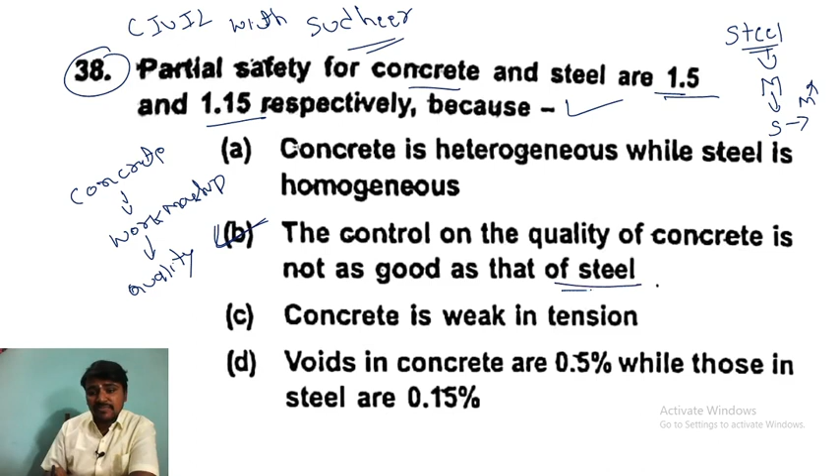Partial safety factor for concrete and steel is 1.5 and 1.15 respectively, because yesterday I explained that concrete is always manufactured by workmanship, so the quality will be compromised and the strength may vary. But coming to steel, it will be manufactured with proper methods, proper specifications, and in good condition, so the strength can be assumed very easily. That's why the partial safety factor for concrete and steel is 1.5 and 1.15, because concrete is heterogeneous while steel is homogeneous. Control on the quality of concrete is not as good as that of steel, so this is the correct answer for this question.

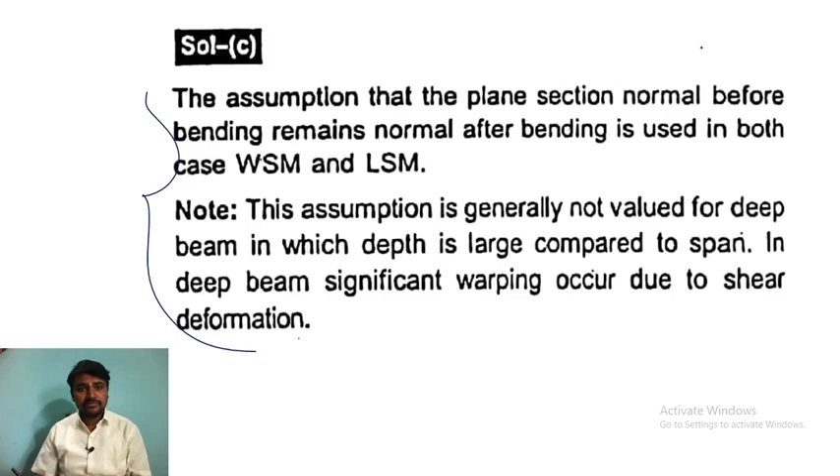Next, question number 39. The assumption that plane sections normal to the axis before bending remain normal after bending is used in which method. Always remember there are design methods - normally we use the limit state method for design of members, and one of the old methods is the working stress method. There are some assumptions we use while designing structural members. Is this assumption used only in limit state method, or only in working stress method, or in both? In both working stress and limit state method we use the plane section assumption. For example, if this is a plane and you bend it, the cross sectional front area will not change, but the total area will change - the plane section itself will not change. That is the important point to remember. So the answer for this question is C.

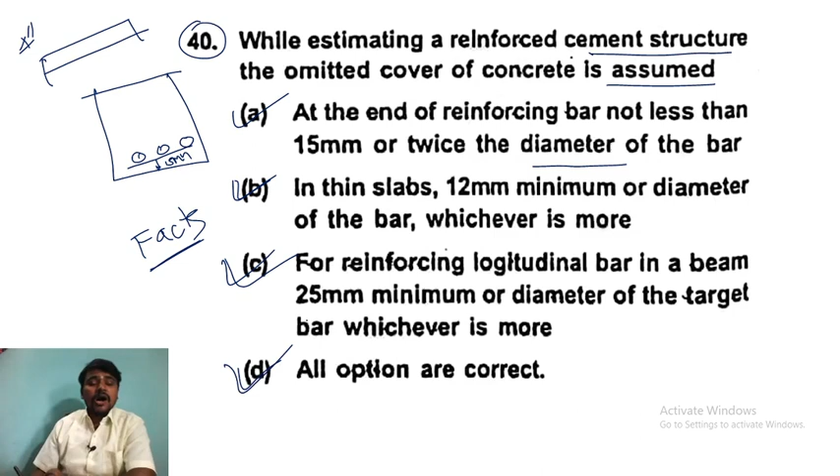Next question: according to Whitney's theory, the maximum depth of concrete stress block in a balanced RCC beam section of depth D is taken as...

They have asked about balance as well as Whitney theory. Whitney theory is different. Let me explain what Whitney theory is. It is for ultimate load theory. It is an ultimate load theory.

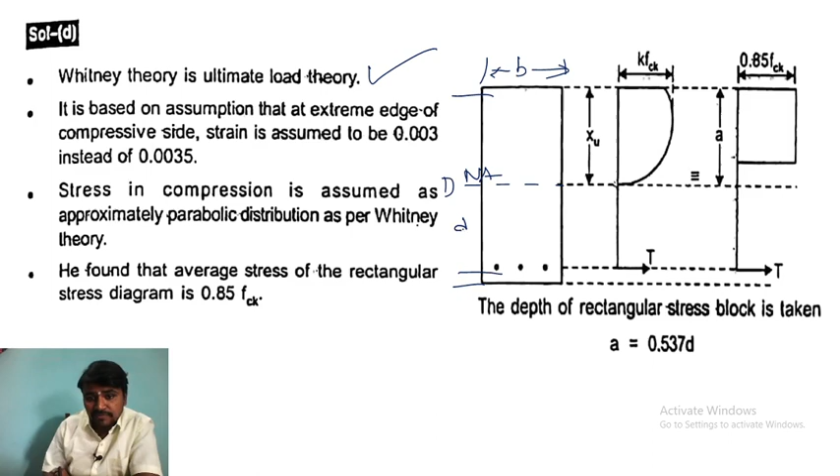You can see this is a sketch and this is the neutral axis. This is a cross section of the beam. This is B and this is the overall depth, and this is the effective depth. So this is a stress diagram and this is a strain diagram. You can see there is always a parabolic portion, and there is a rectangle portion as well.

It is based on the assumption that the extreme edge of compression side strain is assumed to be 0.003 instead of 0.0035. So they are taking 0.003 by using this Whitney theory, ultimate load theory. Stress in compression is assumed as approximately parabola. So this is the stress diagram, and this is the strain diagram.

The strain and T is compression. This is compression, sorry, this is tension here, and this one also tension here. So the depth of rectangular stress block is taken as 0.537 D.

D is the effective depth. He found that the average stress of the rectangular stress diagram is 0.85 FCK. You have already written 0.87 Fy, right? So you have to remember it like this. This is about Whitney theory.

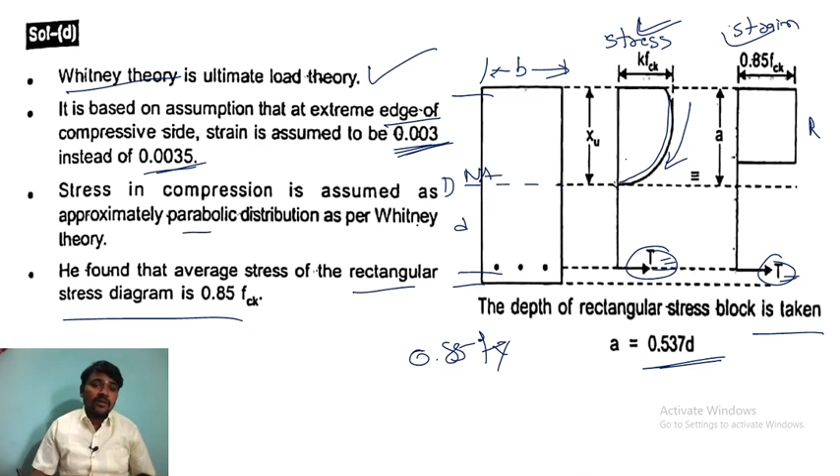Next question, question number 42. Previous question's answer is which one? This question's answer is 0.53 D. Remember, they asked about Whitney theory. If they only ask about the balance section, the answer will be different.

Next question: the limit state of serviceability of pre-stressed concrete sections should satisfy. What should it satisfy? Limit state of serviceability. Another one is which one? There are two limit states: one is limit state of collapse and one is limit state of serviceability. So coming to this one.

The deflection and the cracking section should satisfy to overcome the state of serviceability of any structure. So the acceptable limit for the safety and serviceability requirement before failure occurs is called limit state. Limit state is nothing but safety and serviceability before failure, that we call limit state.

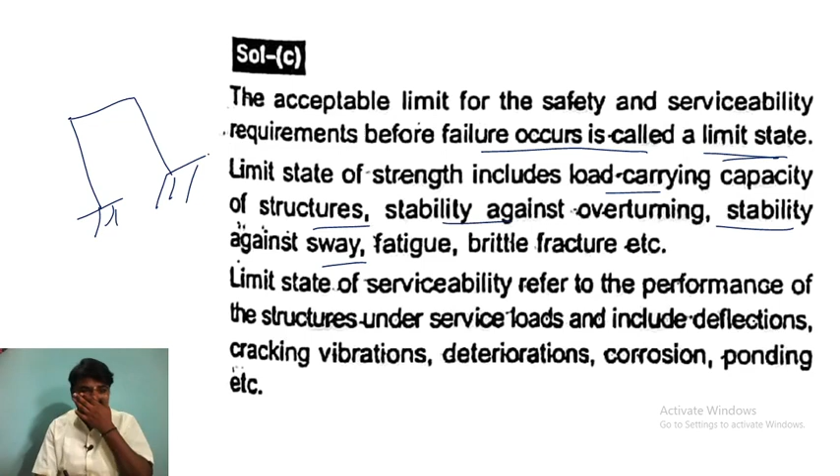So limit state of strength includes what? Load carrying capacity, structure stability against overturning, stability against sway. This is a plain frame. So when you apply the load from this, it will appear like this, that is against sway.

Fatigue, brittle fracture. So limit state of serviceability refers to service loads that include deflection, cracking, vibration, deterioration, corrosion, and ponding. So all these factors you have to remember.

The unit weight of RCC in kg per meter cube: remember, for plain concrete it is 2400 kg per meter cube, and for RCC it is 2500 kg per meter cube. If converted to kilonewton, it is 24 kilonewton per meter cube.

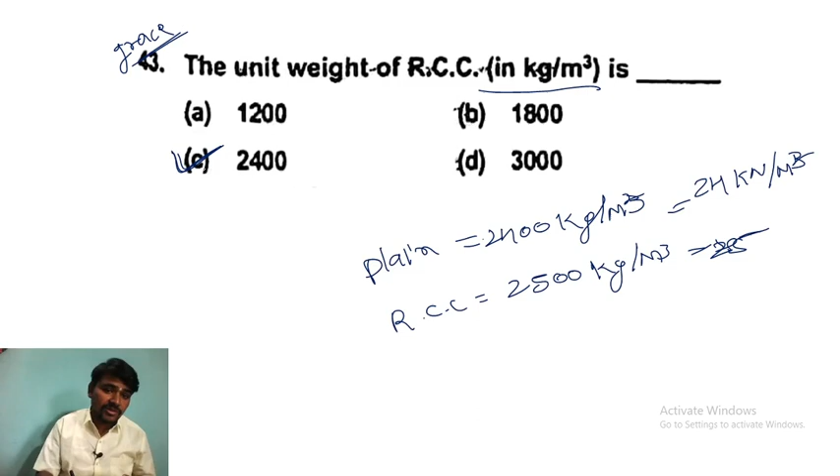Here they asked about the unit weight of RCC, but you can see this is 2400 kg per meter cube for plain concrete, and for RCC it is 2500. Most appropriate option, because they have not given the option nearby. Either you have to tick this one or they will give grace marks, because the options are not given correctly. This is the appropriate answer.

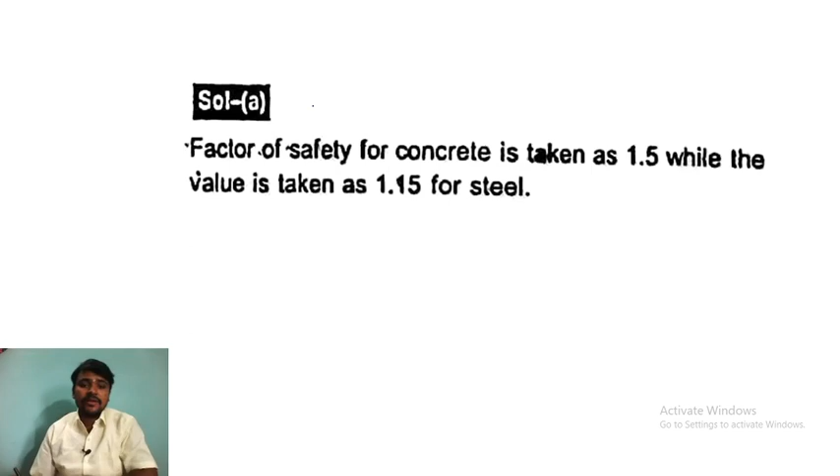The partial factor of safety for concrete as per IS 456: partial safety factor for concrete is 1.5. Factor of safety for concrete is 1.5, and 1.15 for steel.

Next question, question number 45: the approximate allowable stress in axial compression in reinforced concrete. Always remember, for design purpose, yesterday only I have drawn the diagram. This is a stress diagram, and this is strain.

So we have three different lines, we can say. This is 0.002, and this is extreme fiber 0.0035. This one is FCK and this is 0.67 FCK. Why do they take the size effect here? Because what we tested is the cube size, that is 150 mm, but the actual size of the structure is very different. So that's why we have to take the size effect. For the design purpose, for actual purpose, again you have to use 0.67.

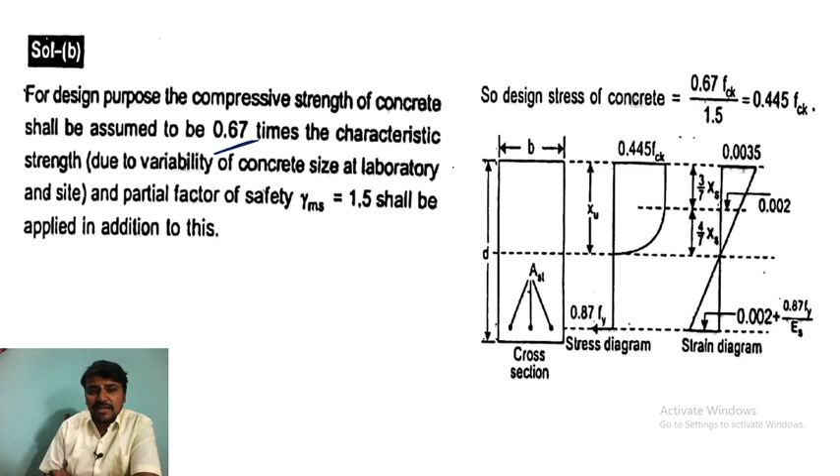0.67 divided by 1.5 gives you 0.44 FCK, so you have to use this 0.44 FCK for design purpose. Design compressive strength of concrete shall be assumed as 0.67 times the characteristic strength. Due to variability of concrete at laboratory and site, a partial safety factor of 1.5 shall be applied in addition to this, giving 0.445.

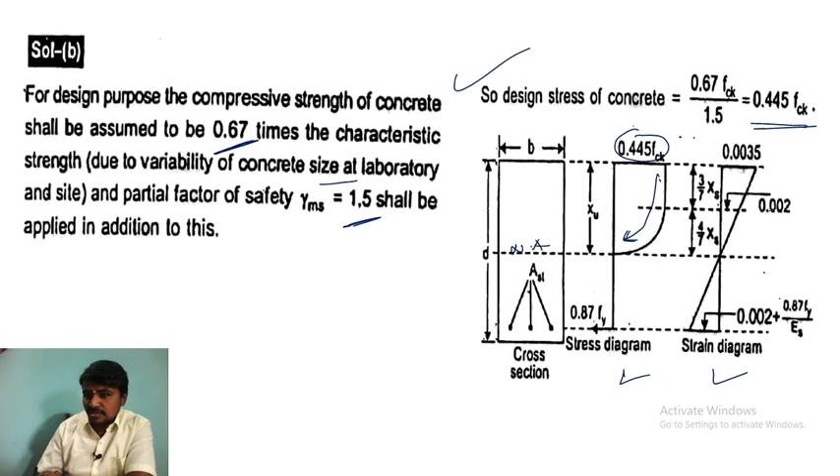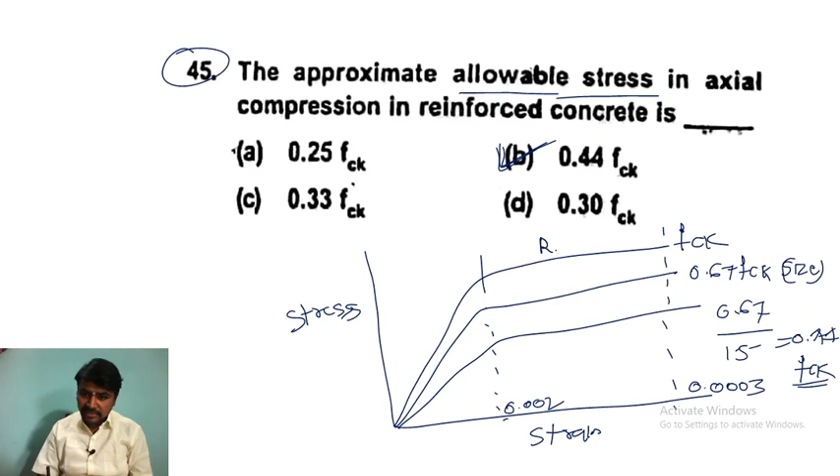This is a stress diagram and this is a strain diagram. You can see 0.445 FCK here, and this is a parabolic portion. XU is the limit depth, or we can say the actual neutral axis. Here is the actual neutral axis. This is 0.002, as shown in the diagram. This is the rectangular portion and this is the parabolic portion.

Next question, question number 46. Tensile strength of concrete to be used in the design of reinforced concrete members is always 0.7 root FCK.

Don't think that all questions are easy, because first I will cover all the easy questions, so that you may have some confidence while studying. Then I will take some difficult questions.

Don't worry. Tensile strength of concrete is 0.7 root FCK and it is tested for 28 days, and the cube size is 150 into 150 into 150 mm.

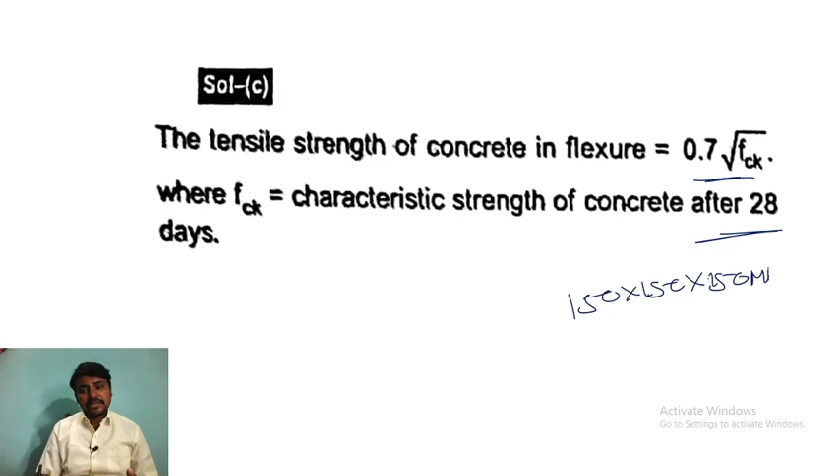Next question: the minimum quantity of cement content that is needed in 1 meter cube of reinforced concrete which is directly exposed to weather.

Minimum quantity of cement content exposed to weather is about...

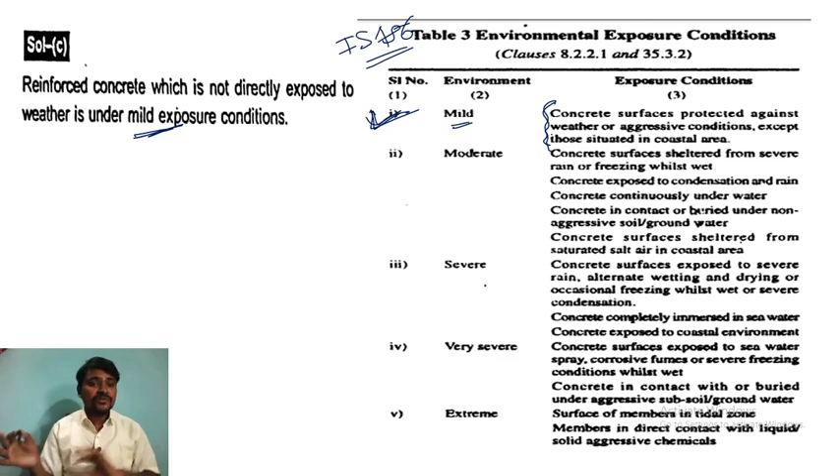And this is table number 5: minimum cement content, maximum water cement ratio, minimum grade of concrete. We will discuss all this, which they have given in clause 6.1.2, 8.2.4.1, 9.1.2.

So how do you remember how to read this table? Very easy. First of all, draw one line here because it is plain concrete and reinforced concrete. You have to remember three different parameters here: minimum cement content, maximum free water cement ratio, minimum grade of concrete.

And 5 conditions: mild, moderate, severe, very severe, extreme. You have 5 exposure conditions. For mild condition in RCC, they have given 300. If they ask moderate, it is 300, for severe 320, very severe 340, and extreme is 360.

So you have to remember the different grades also, they may ask the grades. Easily remember, this is increasing order: 20, 25, 30, 35, 40. You can easily remember 0.55, 0.5, 0.45, 0.45, 0.4. They may ask in plain concrete also, but if possible you have to remember this minimum one for RCC.

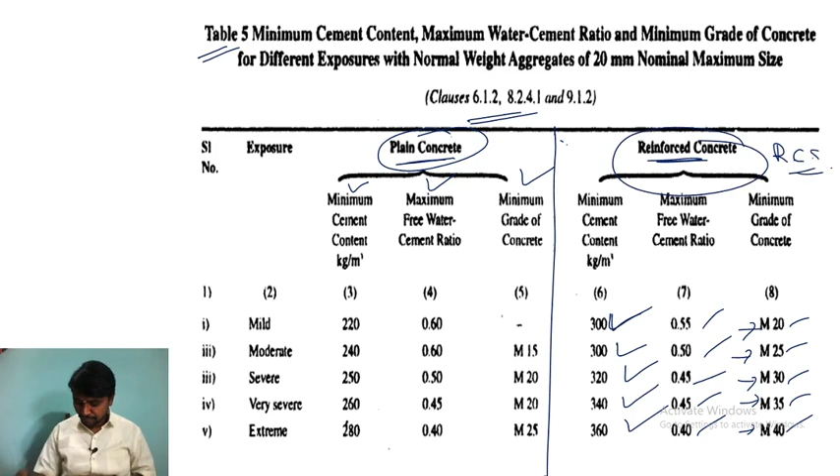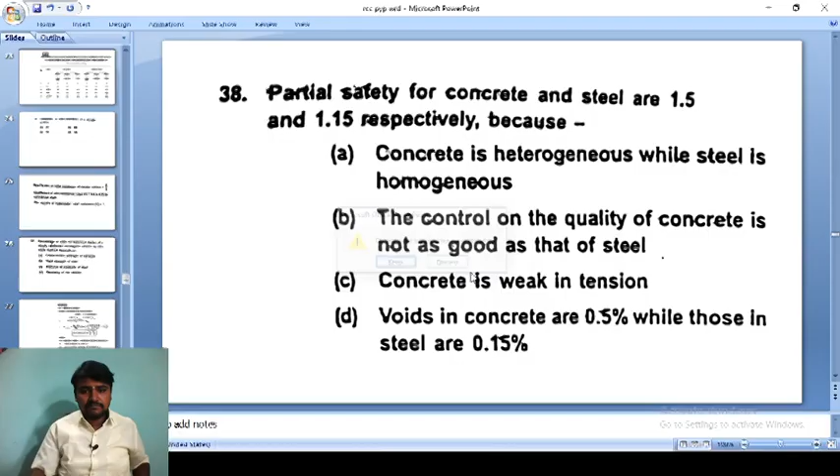Next question, question number 48. Okay, wait a second. One minute.

I will change the color of the pen because it is not visible to you.

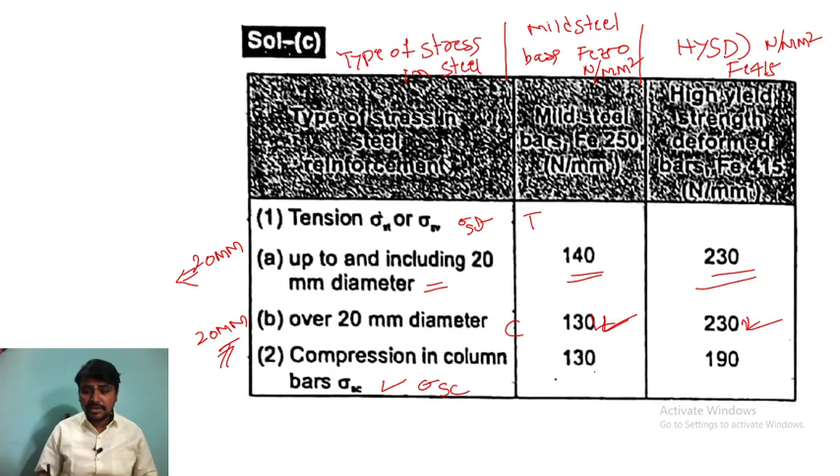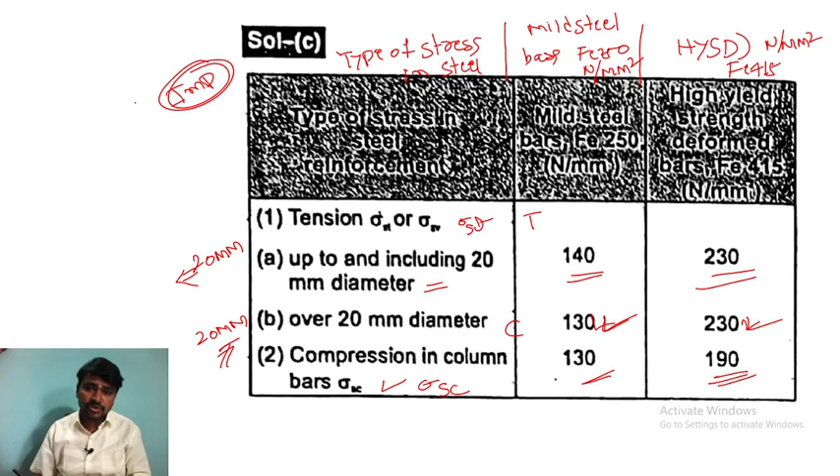If it is in compression, column bars, sigma SC, permissible stress in compression is 130 for mild steel and 190 for the HYSD bar. This tabular column is important, remember this one. You can take a screenshot if you want.

Okay, done. Next question, question number 49.

M10 grade of concrete, approximate dash mix. So M10, how many of you can answer this easily? M10, they are asking.

M10 means, as per IS 10262:2009 - this is a concrete mix design code, you have to remember. Important point: for different grades of concrete, M10 is 1:3:6, M15 is 1:2:4, M20 is 1:1.5:3, and M25 is 1:1:2.

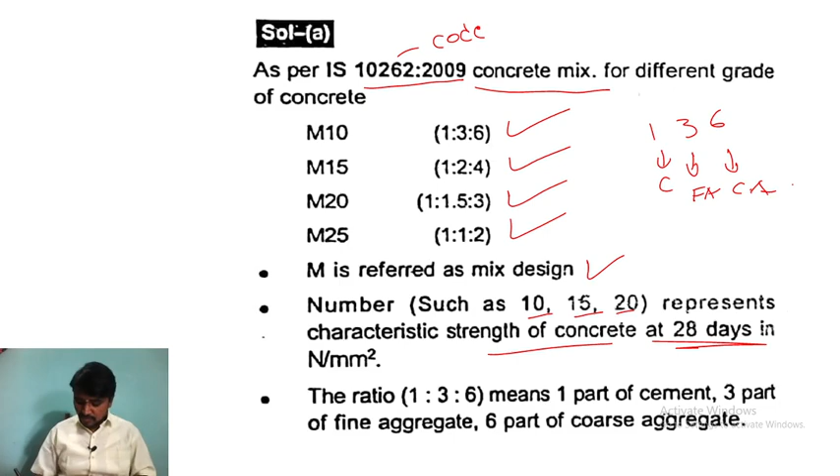Question number 50: the maximum allowable percentage of tension reinforcement in RCC beam. They are asking tension reinforcement, and how much maximum - always remember it is 4%.

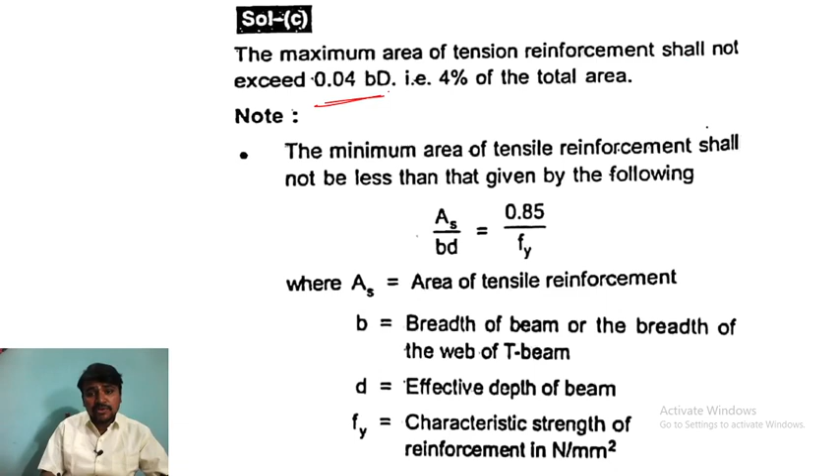Let me explain: the maximum area of tension reinforcement shall not exceed 0.04 B into D. This is the cross sectional area, we can say. When we draw, the beam will come in cross section.

Cross section of the beam, this is the neutral axis. This is B and this is D, overall depth. So when you multiply these, you get the cross sectional area. That is the 4% of the total area they will take.

So the minimum area of tensile reinforcement shall not be less than AS divided by B into D equal to 0.85 divided by Fy. AS is the area of tension reinforcement, and B is the breadth of the beam or the breadth of the web, as in a T beam.

This is the T beam - this is the flange and this is the web. So breadth of the beam or breadth of the web of a T beam. D, small d, is the effective depth of the beam. Fy is the characteristic strength of the reinforcement in Newton per millimeter square. This formula is very, very important.

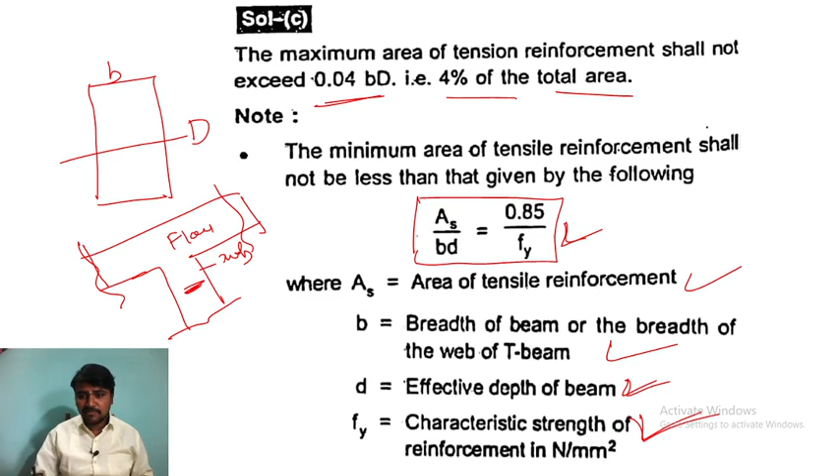Please remember this formula to calculate minimum tension reinforcement in the beam.

Question number 51: if the thickness of a structural member is small as compared to its length and width, it is classified as - before solving this, just remember, for example, this is a slab. The thickness is very less compared to its length.

This is length and this is width. So what will we do? We will ignore the thickness in this type of condition, because the length and width are much higher compared to the thickness. That type we call two-dimensional. Simple question: if they ask what is a two-dimensional structure in a building, remember the slab - thickness of structural member small compared to length and width is called two-dimensional.

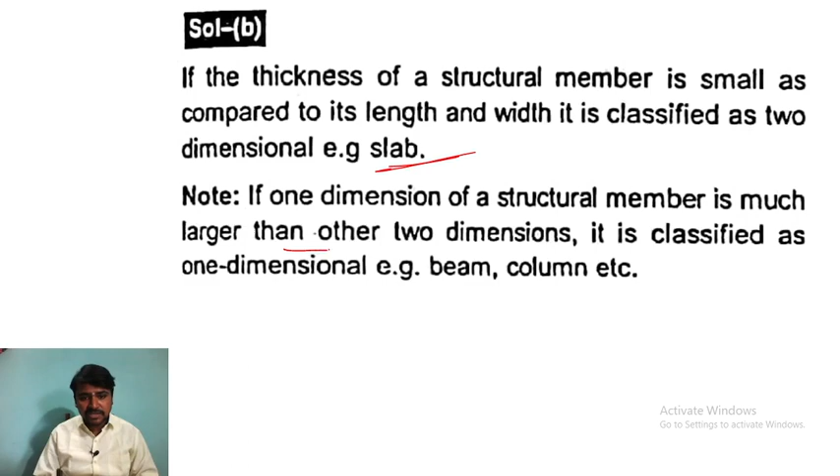Example is slab. If one dimension of a structural member is much larger than the other two dimensions, it is classified as one-dimensional. Example: beam and column. One dimensional is beam and column, two-dimensional is slab. Always remember.

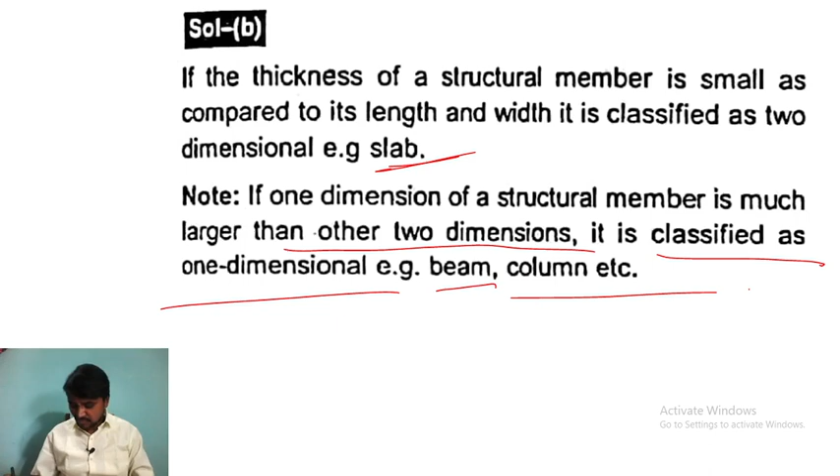Important question: factor of safety is the ratio of what? Yield stress to working stress. Factor of safety is the ratio of yield stress to working stress, or the ratio of ultimate strength of the material to working strength, that is the permissible stress. So yield stress by working stress, and factor of safety relates to the strength of the material.

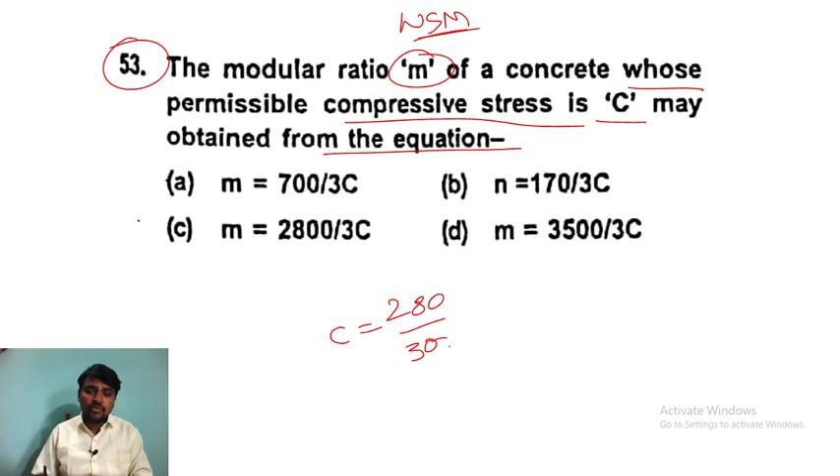Next, question number 53: the modular ratio M in working stress method. When M will come, this is in the working stress method, of concrete whose permissible compressive stress is C, may be obtained from the equation. Always remember M equals 280 by 3 tau CBC. This is the formula, but they have given it differently here. Let me see the difference.

Modular ratio of concrete in working stress method is M equals 280 by 3C, where C is the permissible compressive stress in Newton per millimeter square. It always depends on the grade of the concrete. This permissible strength depends on the grade of concrete. We have a tabular column in IS 456 you can refer to.

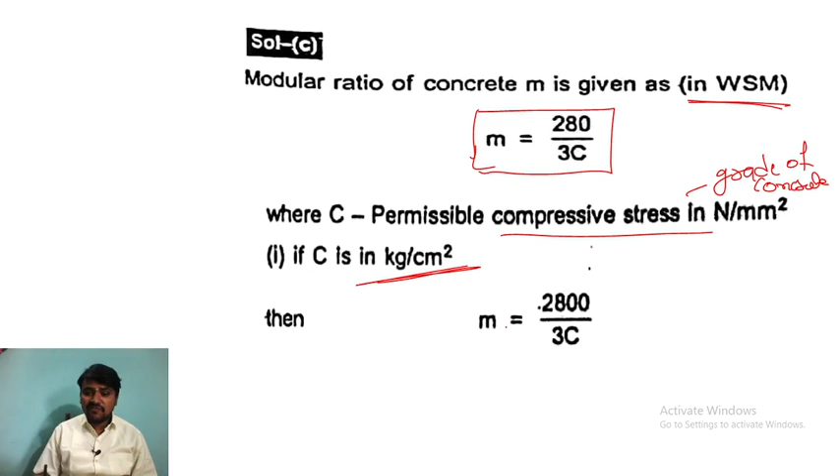If C is given in kg per centimeter square, then the formula changes to 2800 divided by 3C, or instead of writing C, we can write tau CBC also. So the answer for this question is C.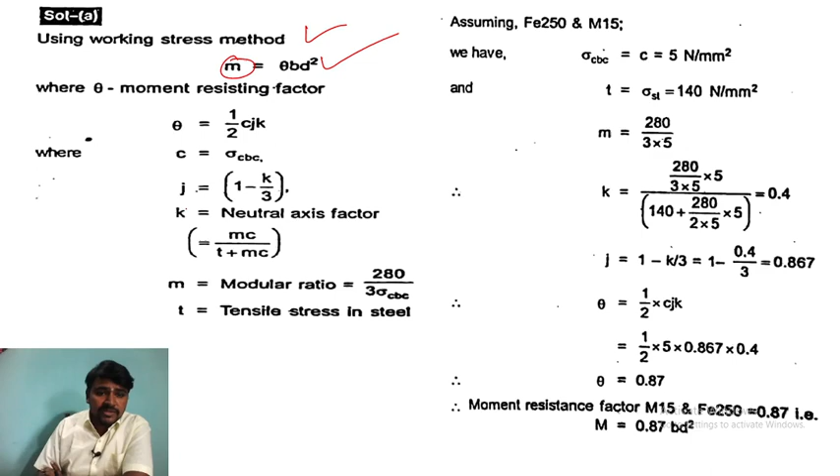K is the neutral axis factor. When you apply this formula using the sigma CBC and modular ratio, you will get 0.87. 0.87 BD square for M15 and Fe 250. For the assumption purpose, they have given M15, but 250 they have taken as mild steel for assuming.

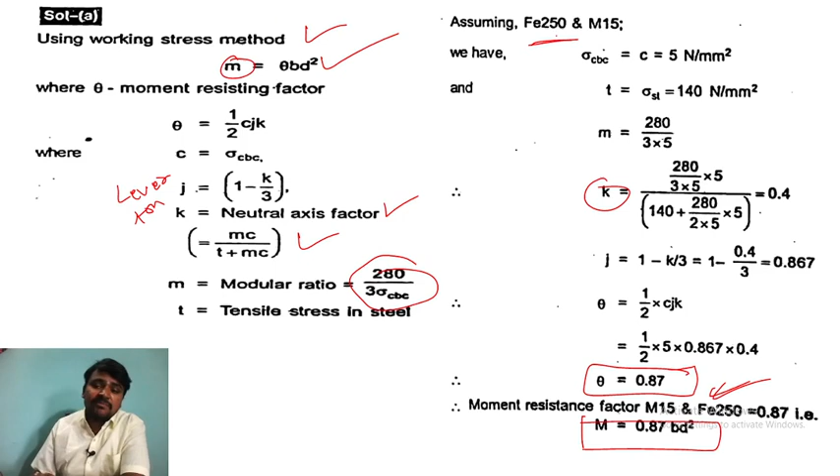Next question: if the stress in each cross section of a pillar is just equal to its working stress, this form is called... When each cross section of a pillar is just equal to its working stress, we can say all the sections are a form of equal strength. For example, they are saying this is the pillar - each cross section means breadth, this is depth, and this is B. Cross section of the pillar just equals its working stress means however much load you apply, it will take that only. So that is a form of equal strength for all the pillars.

According to IS 456, the number of grades of concrete mixes - remember this, it is very very important. They are asking the number of grades of concrete mixes. So according to IS 456:2000, first one is ordinary concrete, that is from M10 to M20 - 10, 15, 20, so 3 numbers.

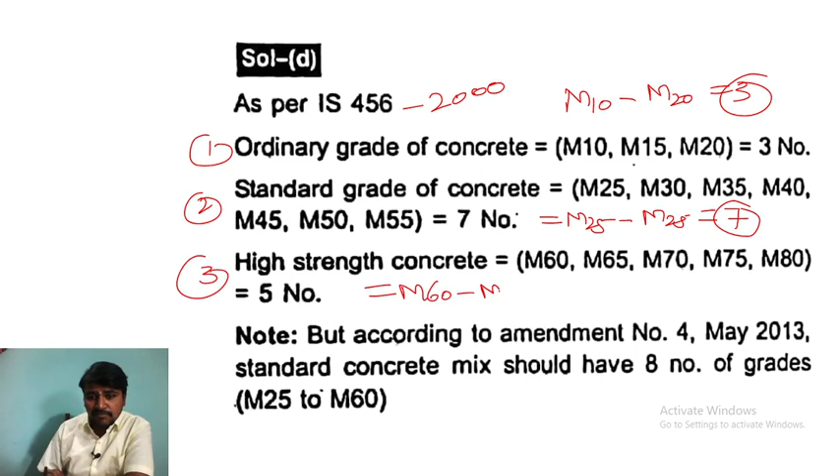Second one, standard concrete. In standard grade of concrete from M25 to M55. How many numbers? 7 numbers. Third one, high strength concrete, from M60 to M80. How many numbers? 5 numbers.

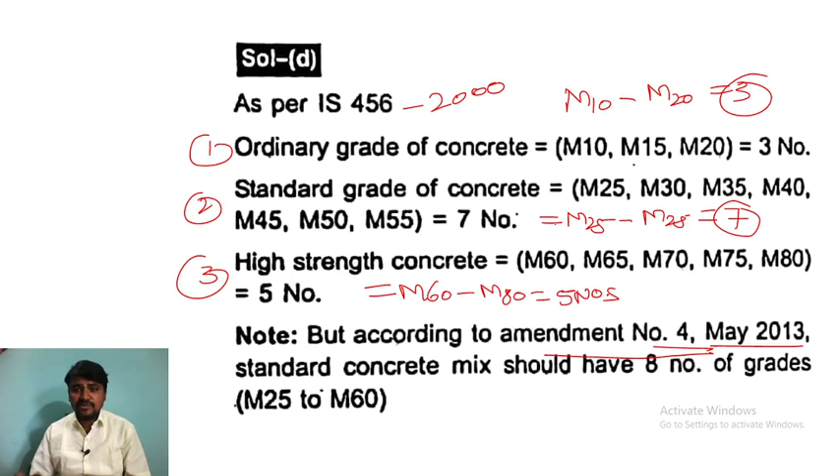But according to amendment number 4, May 2013, they changed standard concrete from M25 to M60. So the number of grades will now be 8, because they have taken M60 into standard concrete, and in high strength concrete it is from M60 to M100 as already mentioned. So you have to remember how many grades to count. The answer for this question is 7, because they have given appropriately only 7; if they give 8, you have to select 8.

Right, done. Question number 57.

As per IS specification, the nominal concrete cover for moderate exposure should not be less than what? See, this is exposure condition, this is nominal cover, this is minimum grade of concrete. For mild condition it is 20 mm, so grade of concrete is M20.

Mild, moderate, severe, very severe, extreme - you have to make a song out of these to remember them easily, otherwise in sequence you can't remember them.

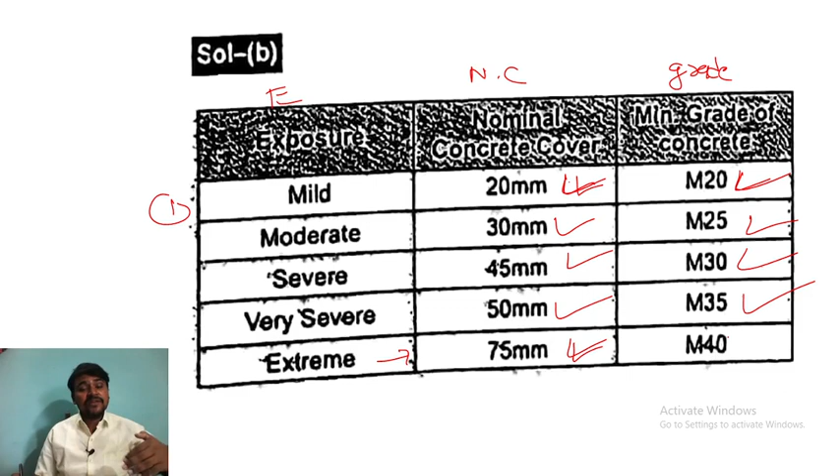So for mild, 20 mm nominal cover, and the grade is also 20 (M20). For moderate it's 30 mm, grade of concrete M25. Severe is 45 mm, grade M30. Very severe is 50 mm, grade M35. Extreme condition is 75 mm. As the exposure condition goes down the list, the nominal cover increases and the grade of concrete also increases.

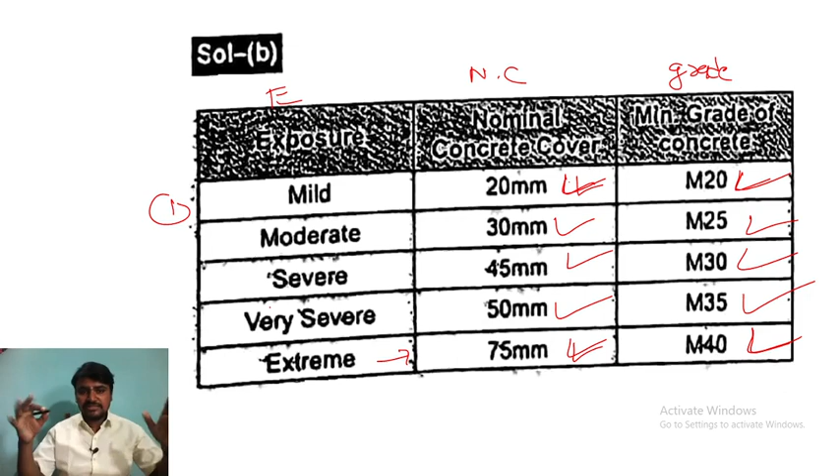Question number 58: The factor of safety for steel as compared to concrete is always lower. I have already explained why it is lower, so we will not repeat that question.

In limit state approach, spacing of main reinforcement controls primarily what? For example, this is the plan view - these are the main reinforcement and these are the distribution bars. So what does the main reinforcement control primarily?

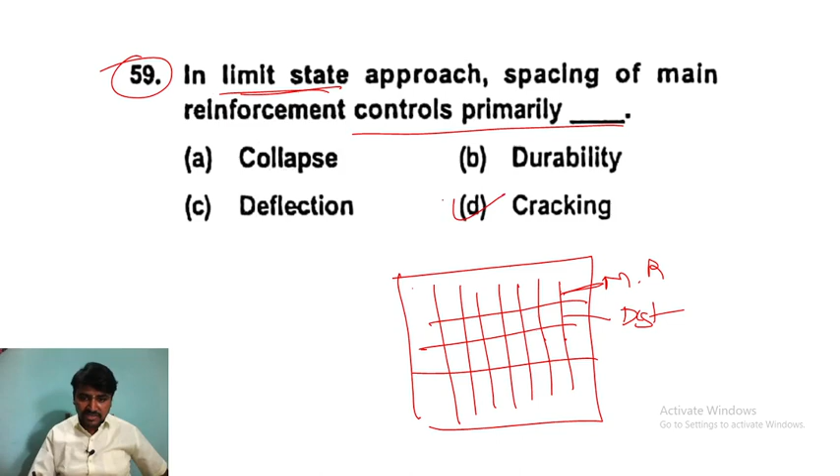It always controls cracking. So in limit state approach, spacing of main reinforcement primarily controls cracking within permissible limit under normal exposure condition - meaning mild or moderate conditions control the cracking.

So durability of the member is ensured by cover requirement and grade of materials. Deflection of the member is ensured by taking span to depth ratio. For cantilever it's 7; for simply supported, how much? Yesterday only I explained you. For simply supported and for continuous, how much?

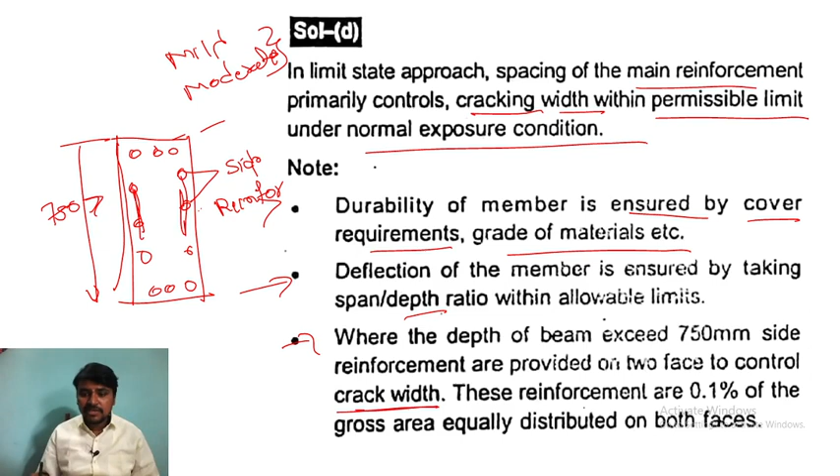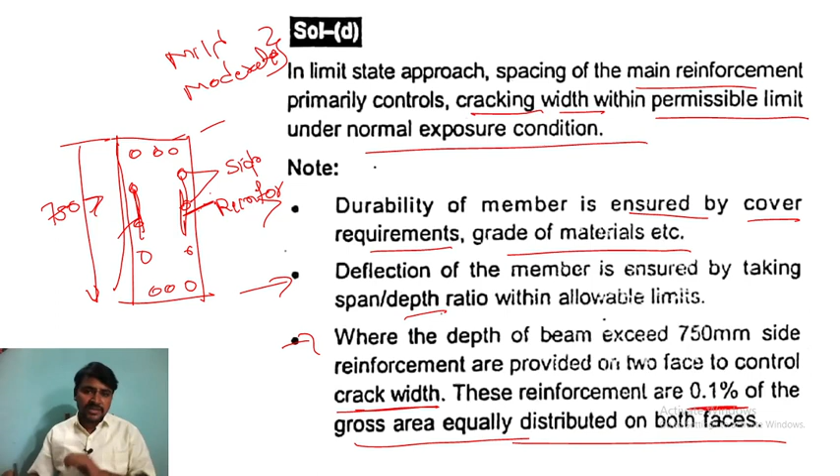To control the crack width, these reinforcements are 0.1% of the gross area, equally distributed on both faces - here and here. Have you understood what side reinforcement is and why you have to apply it? By questions only you can know so many things.

Question number 60: In bending, the maximum strain in concrete at the outermost compression fiber is taken as what? They are asking maximum strain - the outermost compression fiber is 0.0035.

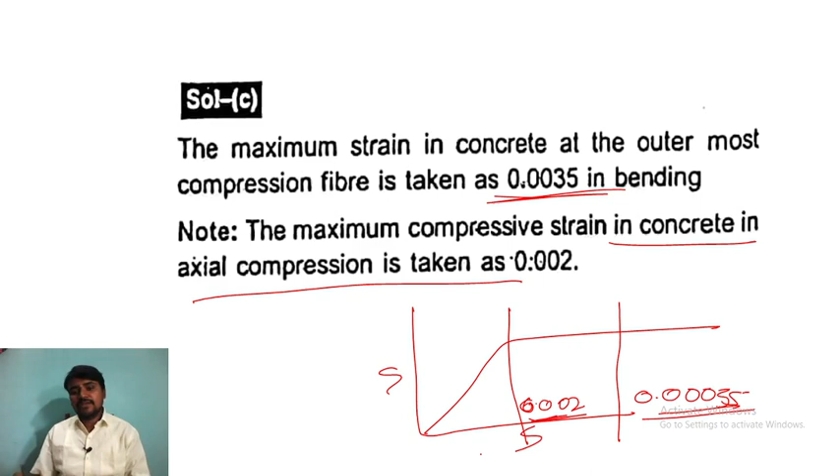Maximum compression strain in concrete in axial compression - here this is 0.002. This is axial compression, and 0.0035 is the outermost compression fiber. Here is stress and this is strain. Simple questions - you have to remember the answers.

Question 61: In the design of pre-stressed concrete structure, which of the following limit state will come under the serviceability limit state? Before answering this, first remember the limit state method - we have two different limit states. One is limit state of serviceability.

One is limit state of what? Collapse. So they are asking, serviceability means what actually they will take.

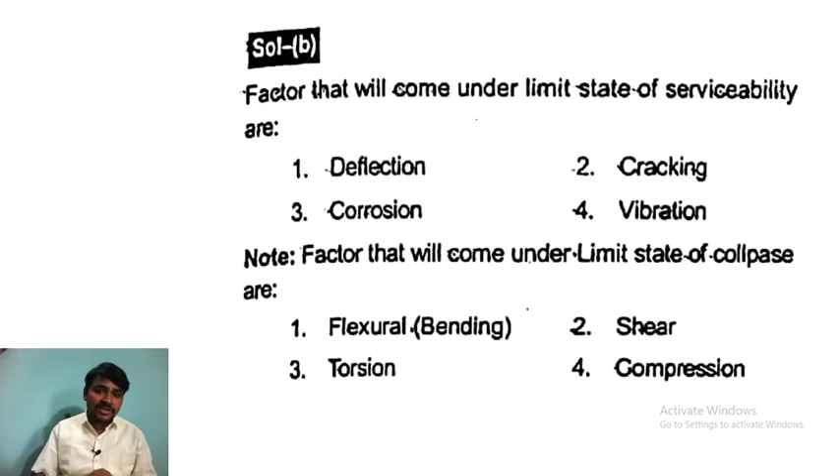Let me tell you, factors that come under limit state of serviceability are deflection, corrosion, cracking, vibration. Serviceability means after the construction, what is the deflection, what is the corrosion after how many years, cracking after how many years, vibration due to any uncertain environmental conditions. So all these factors after the construction, that is the serviceability.

And limit state of collapse are flexural, that is bending, shear, torsion and compression. These are the important factors for both while studying, either serviceability or collapse. Please remember these 8 points.

You can answer anything on the LSM and working stress method or limit state method. Question number 62. In case of reinforced concrete, what is the minimum grade of concrete that should be used in seawater or when exposed directly along the sea coast? Let me read the question one more time. In case of RCC, what is the minimum grade of concrete that should be used in seawater or when exposed directly along the sea coast?

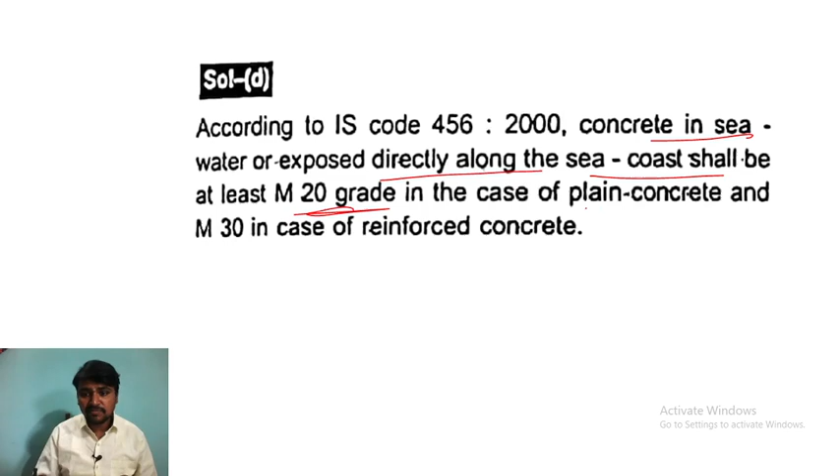To answer this, always remember the mild, moderate exposure tabular column. In IS 456, concrete in seawater exposed directly along the sea coast shall be at least M20. Sea coast is M20 in case of plain concrete and M30 in case of reinforced concrete structure. So M30 is the answer for this question. And minimum grade of RCC for any construction is M20. Remember this one.

Next question. The section of reinforced beam where most distant concrete fiber in compression and tension in steel attains permissible stresses simultaneously. Yesterday only I explained three different sections: over reinforced, under reinforced and which one? Balance section. Now when we read this question, simultaneously means always it is balance section.

So critical section and economic section will not come. You can see by looking at the options also, you can directly tick. So this is the answer for this question.

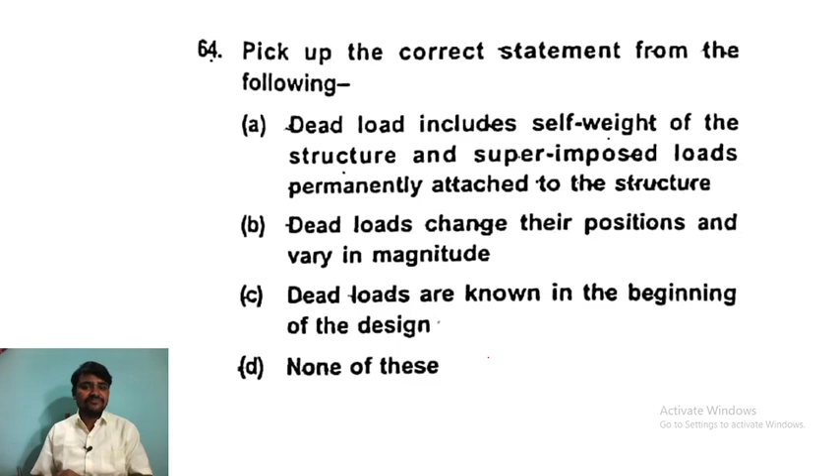Next question. Pick up the correct statement from the following. Dead load, they are asking about the dead load. It includes self weight of the structure and superimposed loads permanently attached to the structure. This is correct, first one is correct.

Second, dead loads change their position and vary in magnitude. Dead load will not change. Live load always changes because you can move the chairs, tables in your houses. Dead loads are known in the beginning of the design. And none of these.

So the answer for this question is dead loads include self weight. Now, dead loads are examples of gravity loads, act vertically downwards and are relatively constant over time. Examples are beam, columns, slab, as well as non-structural elements, floor coverings, false ceilings. All these we have to remember, it will come in dead load.

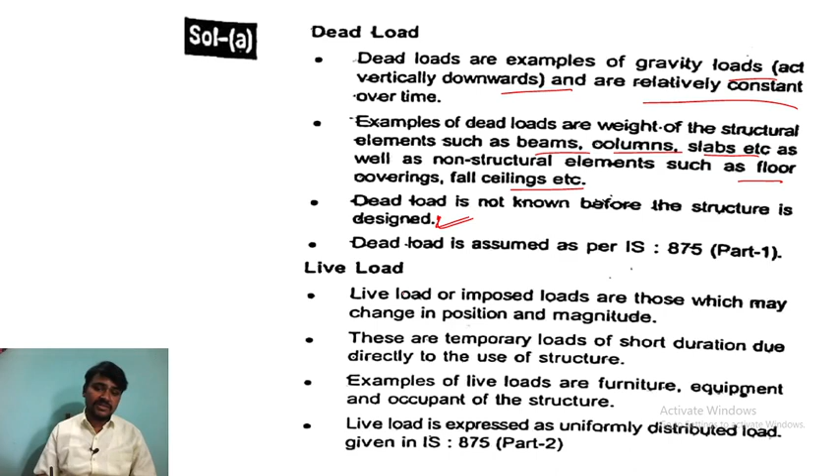Dead load is not known before the structure is designed. After the structure is designed, then dead load is calculated. The code for dead load is IS 875 part 1. Remember this code. For dead load, this code book is used. Code for live load is IS 875 part 2, I think, right here part 2.

Live load is imposed load, those which change in position, and temporary loads, short duration, anything. I am sitting on a table, I am a live load. So examples of live loads are furniture, equipment and occupants of the structure. Dead load and live load, important takeaway from this question is the code book IS 875 part 1 is dead load, part 2 is live load.

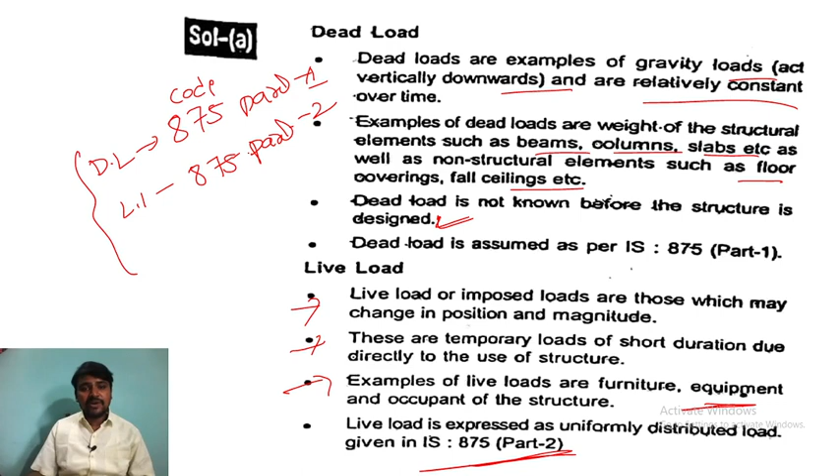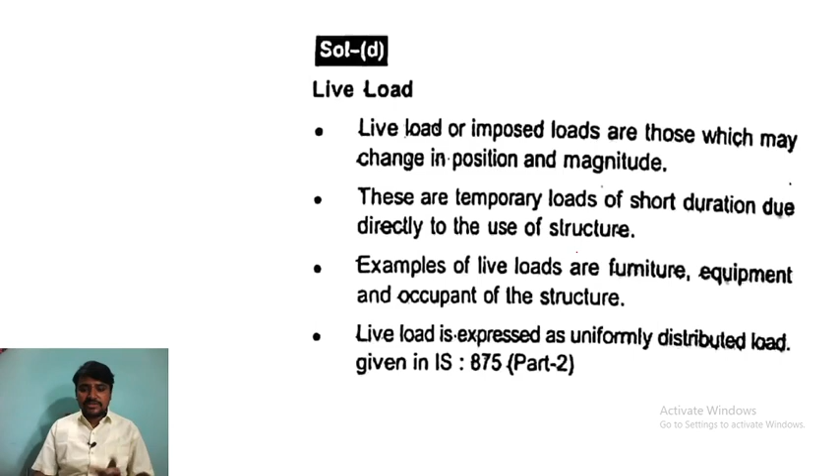Next question. Live load varies in magnitude, correct. Varies in position, correct. Expressed as uniformly distributed load, all options are correct. Just we have studied about the live load, no need to study one more time.

In a singly reinforced beam, this is the cross section of the beam. This is the neutral axis of the beam, where stress and strain are zero. This is compression zone, this is tension zone. If you provide only steel at the tension zone, that we call singly reinforced. If you provide steel at both compression zone and tension zone, that is a doubly reinforced beam. And if applied only at tension zone, it's a singly reinforced beam.

Now let me read the question. In a singly reinforced beam, if the permissible stress in concrete reaches earlier than that in the steel, the beam section is called as. They are asking stress in concrete reaches earlier than the steel, meaning concrete will fail first, so it is over reinforced.

When the concrete fails, that is over reinforced, meaning brittle failure. If the concrete fails, it will not show any type of strain, it will fail directly - brittle failure, we can say that is a brittle failure. That is an over reinforced section. In over reinforced section, maximum permissible value prior to the steel, X is more than XCR, AST actual is more than AST balance.

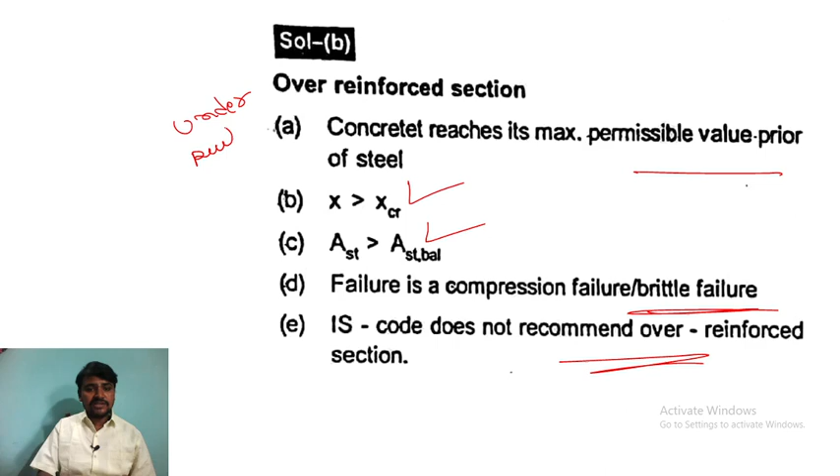Failure in compression is brittle failure. IS code does not recommend this. They will only design under reinforced section. Always we design under reinforced section. Question number 67. Permanent dimension changes due to loading of concrete is termed as.

Permanent dimension changes due to loading of concrete, when the dimension as well as loading are for the long term, is called creep. When concrete is subjected to sustained compression loading, its deformation keeps on increasing with time even though the stress level is not altered. The time dependent component of total strain is called creep.

It is time dependent, so you can take this sketch. You can see first the instantaneous strain, then creep strain, and when the load is removed, it will again come down. So we have instantaneous recovery and creep recovery, and the residual creep strain remains.

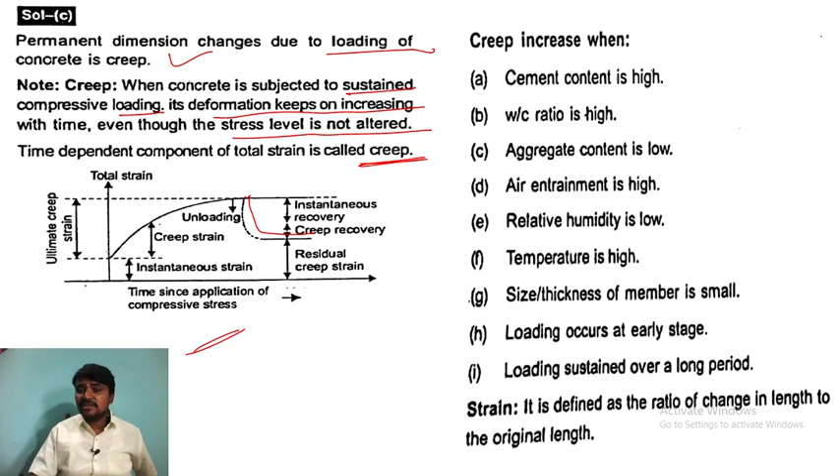Why does creep increase? If the cement content is high, water cement ratio is high, aggregate content is low, air entrainment (admixture) is high, relative humidity is low, temperature is high, size and thickness of the member is very small, load occurs at an early age, or loading is sustained over a long period of time - these all are factors that may increase the creep, so you have to take care about them.

So what is strain? Strain is defined as a ratio of change in length by original length.

Next question, question number 68. Which IS code gives details regarding water to be used in concrete? Is it IS 456? Always remember, IS 456 recommends the quantity and quality of water you have to use for construction purposes. So IS 456 code gives details regarding water to be used in concrete, that is the requirement of section 5.4 of IS 456. If you want, you can go through article 5.4 in the IS 456 code book. Water used for mixing and curing shall be clean and free from impurities.

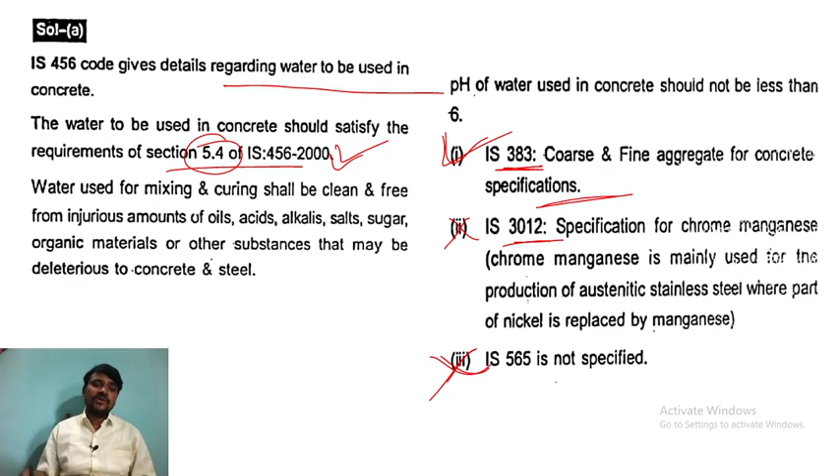IS 383 is for coarse and fine aggregate for concrete specification - very, very important. IS 3012 is for chrome manganese, mainly used for the production of austenitic stainless steel, where part of the nickel is replaced by manganese. If you want, you can remember just this one. IS 565 is not specified. So remember these two points, IS 383 and IS 456.

Next question, question number 69. How does an increase in the pitch of a roof affect things? This is pitch.

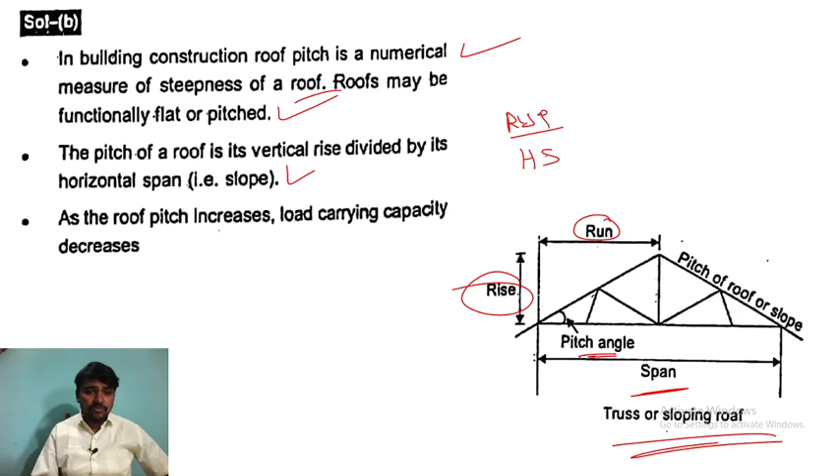As the pitch increases, the load carrying capacity always decreases. Why? In building construction, this is the run and this is the pitch of the roof or slope - this is the pitch angle and this is the span, for a truss or sloping roof, and this is the rise. So in building construction, roof pitch is a numerical measure of steepness of the roof. Roofs may be functionally flat or pitched. Pitch of roof is vertical rise divided by its horizontal span. As the roof pitch increases, load carrying capacity decreases.

Done, next question. Which of the following statements is true? Let me read: most of the loads applied to a building are environmental loads - not environmental loads. Most of the loads are dead load followed by live loads. I think this one is correct because all loads are not environmental loads.

Let me discuss. Different types of structural loads act on a building like dead loads, live loads, and environmental loads like wind load, snow load, earthquake load, and thermal load. Out of them, the major loads are dead load followed by live load. That's why environmental load is not a major load.

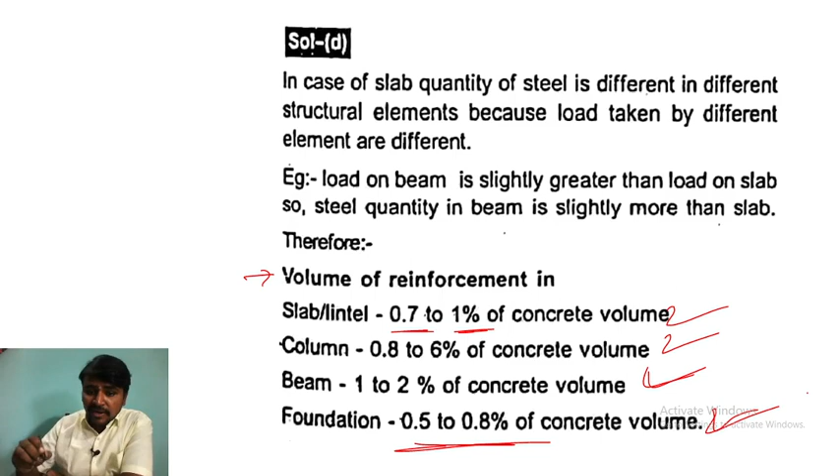Question number 71: when not specified, the volume of steel in RCC work is taken as - if they don't give any specification, how will you take the volume of steel? Always remember the volume of reinforcement. For example, volume of reinforcement in slab to lintel is 0.7 to 1% of concrete volume, for column 0.8 to 6% of concrete volume, for beam 1 to 2%, for foundation 0.5 to 0.8% of concrete volume. But here you can see one value - 0.5 to 2% is the maximum for any type of structure.

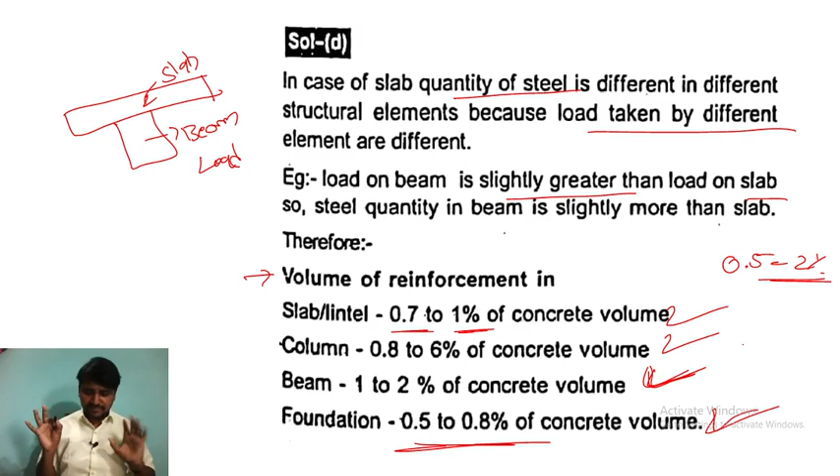0.5 to 2% is maximum, you can't take more than that. Important point: in case of slab, quantity of steel is different in different structural elements because the load taken by different elements is different. Load on beam is slightly greater than load on slab. This is slab, and the beam will be constructed here. Beam always takes more load compared to slab, that's why slab and beam have a difference in the percentage of steel also. Simple concept. The answer for this question is D, 0.7 to 1% RCC volume.

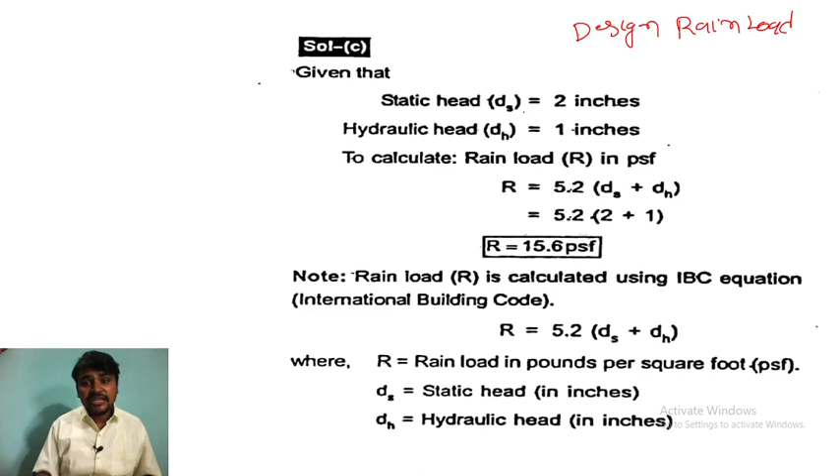Question 72: What will be the rain load in PSF if DS is 2 inches and DH is 1 inch? This question relates to design rain load, where rain is heavy. Given static head DS is 2 inches, hydraulic head DH is 1 inch, we need to calculate the rain load. The formula is R = 5.2(DS+DH), which gives 15.6 PSF. This rain load is calculated using the IBC equation, the International Building Code formula, where R is rain load in pounds per square foot, DS is static head and DH is hydraulic head in inches. Simple formula, you have to remember it.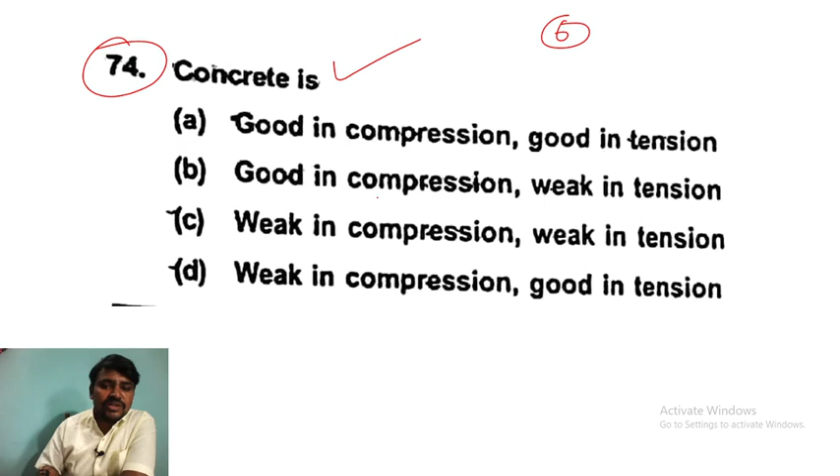Only 6 questions left for this session. Concrete is good in compression and weak in tension. Simple question with simple answer, just remember this.

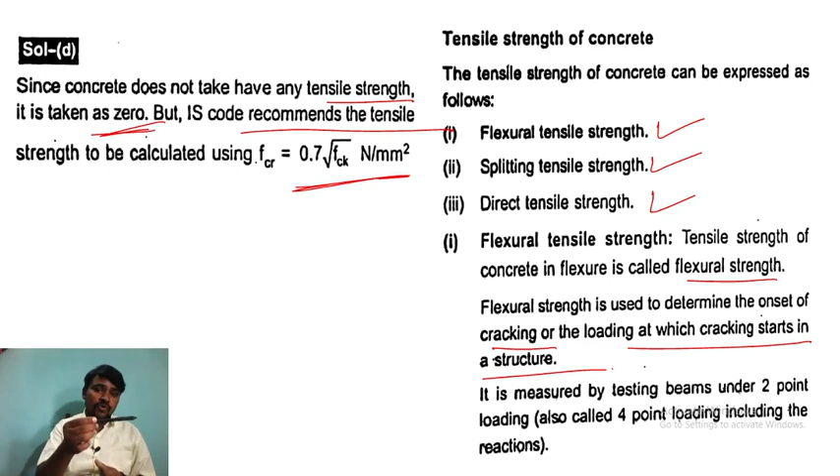Question 75: In the design of RCC structure, the tensile strength of concrete is taken as. We always say tension will be neglected, so we will not consider tension while designing RCC structures, we only take compression force. If you want to calculate it anyway, it is taken as 0, but IS code recommends 0.7 times root FCK. There are 3 different tensile strengths: flexural tensile strength, split tensile strength, and direct tensile strength. Flexural tensile strength of concrete is called flexural strength, used to determine the onset of cracking, or the load at which the crack starts in the structure. For example, if you apply a load on a pen, at what force will it crack - that's flexural tensile strength. It is measured by testing beams under 2-point load.

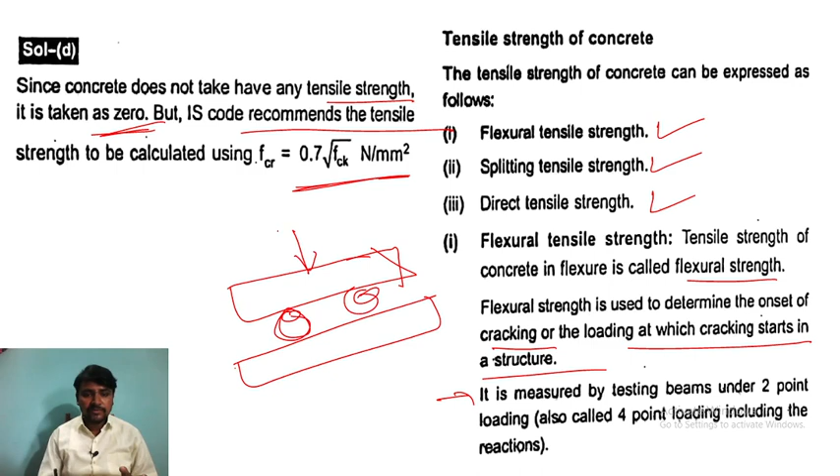2-point load, you understand? This is P. Next, split tensile strength - you can see the sketch here. Split tensile strength is measured by testing a cylinder of size 150mm diameter and 300mm length. Because of difficulty in applying uniaxial tension to a concrete specimen, the tensile strength is determined by an indirect method - if they ask what the indirect method is, that is the split tensile strength method. We apply the load here through these plates, from the top and at the bottom also, so the crack will appear like this. The split tensile strength formula is 2P divided by pi*d*l.

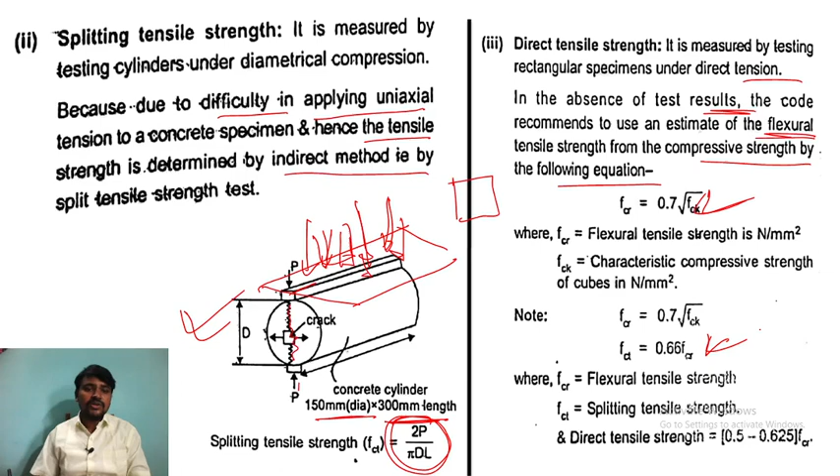Direct tensile strength is measured by testing a rectangular specimen under direct tension. In the absence of test results, the code recommends using an estimate of flexural tensile strength from the compressive strength by the equation: tensile strength always depends on compressive strength, that is 0.7 times root FCK. You have to remember this. So the answer for this question is none of the above, because we will not take the tensile strength.

Question 76: In which beam is the tension capacity of steel greater than the combined compression capacity of steel and concrete?

So it is over reinforced, because the capacity of steel is greater - the combined compression capacity of steel and concrete greater than the combined compression capacity will be over reinforced.

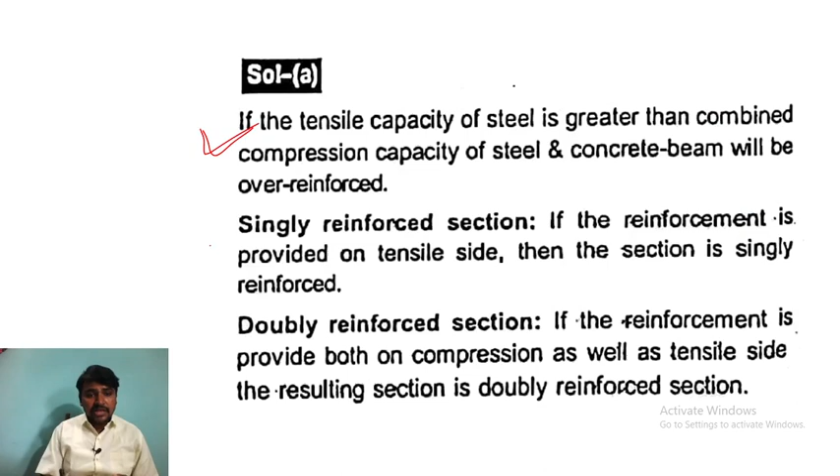Singly reinforced beam and doubly reinforced beam, I have already explained. This is a cross section - neutral axis, compression zone, tension zone. If you apply steel only at the bottom, that is singly reinforced. If applied both at compression zone and tension zone, that is doubly reinforced beam. So these two are those only.

Question number 77: The beam outside a wall up to the floor level above it is known as - it is always spandrel beam. So what is spandrel beam? Let me explain.

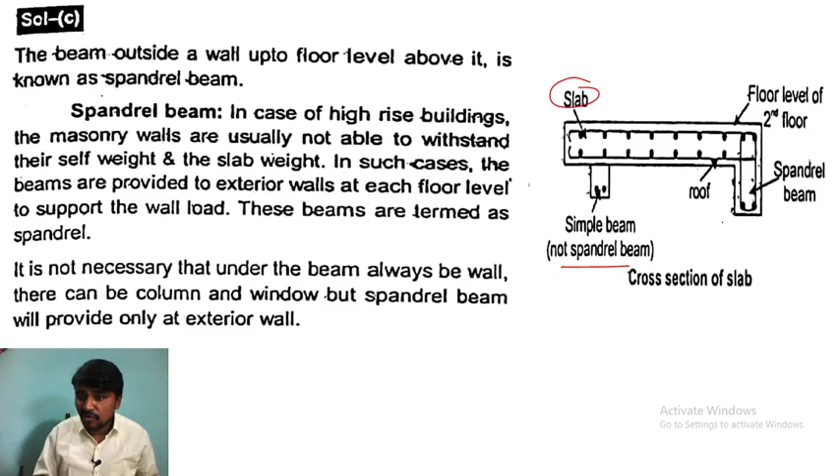You can see, first see the sketch. This is a slab, and at the bottom you have a simple beam, not spandrel beam. But at floor level - this is second floor, this is a spandrel beam here, and this is a roof. So this is the second floor, and it is up to - we call this a deep beam also, spandrel beam. So the beam outside a wall up to floor level above it is known as a spandrel beam.

In case of where it is used: in high rise buildings, the masonry walls are usually not able to withstand their self weight and the slab weight. In such cases, beams are provided to exterior walls at each floor level to support the wall load. These beams are termed as spandrel beams.

In a high rise building, for example, if you are constructing a 20 floor building, if you are constructing the wall just above this one, if you use a normal beam, it will not withstand that weight. So we have to use the spandrel beam, meaning the depth of the beam increases floor by floor.

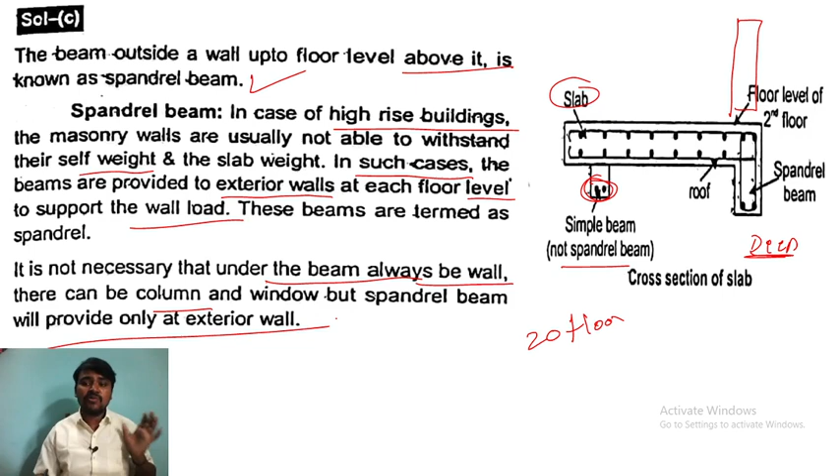It is not necessary that under the beam there always be a wall - there can be a column and window, but spandrel beam will provide only at the exterior wall. Remember, spandrel beam is only provided at the exterior wall, not at the interior.

Next, the weight of reinforced concrete is generally taken as - weight of reinforced concrete is 2500 kg per meter cube. They are asking weight, but this is the density. But by seeing the option we can say - by seeing the option we can answer easily.

With usual notations, the depth of neutral axis of a balanced section is given by - they are asking what? Depth of neutral axis for balanced section. Let me tell you, for singly reinforced section.

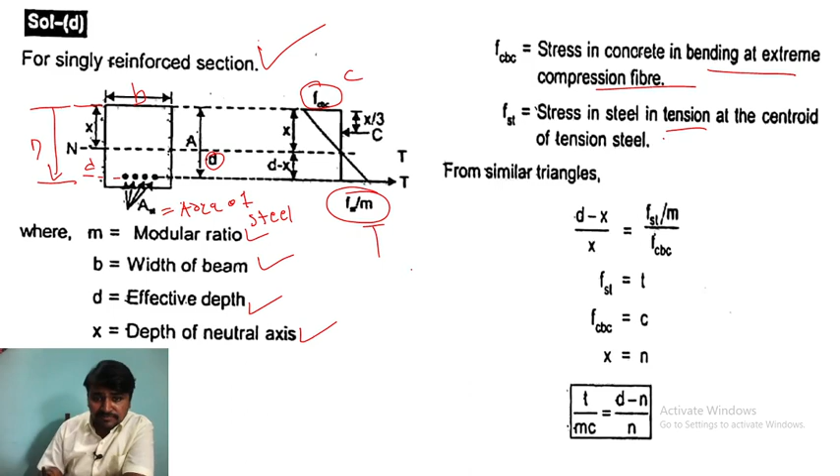FCBC is what? Stress in concrete in bending at extreme compression fiber. FST is stress in steel in tension. Where is FST? Here. So if this is FCBC - it is in compression, this is compression, this is tension.

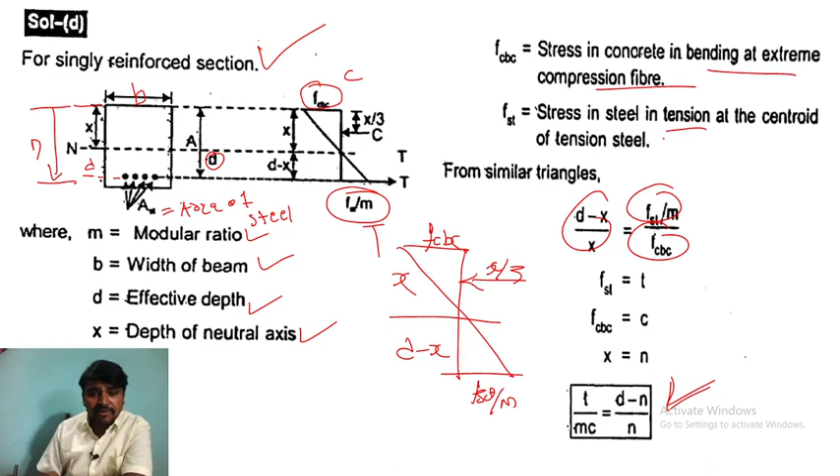From similar triangles, they have taken this one - FCBC, and this is FST by M, and here this is X and this is D minus X. And at this point they have taken X by 3, D minus X by X, and FST by M and FCBC. So you will get T by MC is equal to D minus N by N. So this is, for the usual notations, the neutral axis of a balanced section.

It is some different question, a different question, okay. So the answer for this question is D - MC divided by T, N divided by D minus N.

Next, today's last question: According to IS 456, the number of grades of standard concrete is 7. Just I have explained - this one M25 to M55.